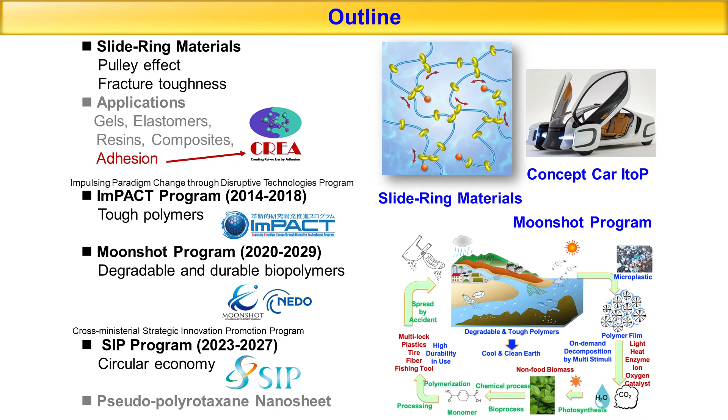What does a circular economy mean? I've been involved in polymer research on plastics, and the circular economy for plastics has been a hot topic in Europe. If you look on the internet, you'll find lots of discussion about this. Plastics are all around you.

Actually, plastics were developed about 100 years ago. Around us, there were ceramics and metals. They were replaced with plastics, and now they're everywhere. There has been mass production, mass consumption, and mass disposal.

The model for plastics has been to manufacture them, then either throw away, incinerate, or use them in landfills. But we'd like to find ways to use them longer, so that resources can be circulated instead of wasted. That is called a circular economy. I've been involved in projects related to such a circular economy.

You may have heard of the term 3R: reuse, reduce, and recycle. When you hear circular economy, people often think of recycling, but reuse is the most important. We want to use products over a longer period, but plastics are brittle and often get discarded.

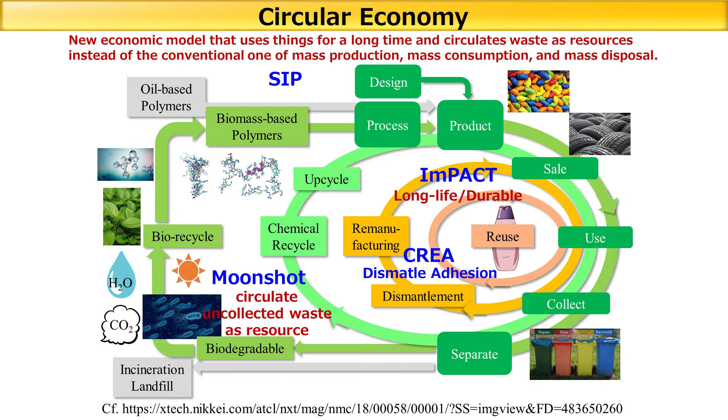For some, plastics might be an unfamiliar concept, but many materials in our world are essentially plastic, rubber, fiber, or even gel-based. Others include glass and ceramics. As mentioned earlier, this category encompasses rubbers like tires, textiles, fibers, clothing, and various gels. Indeed, these are all polymers.

Interestingly, our body's DNA and proteins are also polymers. In essence, polymers differ from metals and ceramics in that they are lightweight, primarily composed of carbon, hydrogen, and oxygen atoms, all of which are lightweight elements.

Whereas metals are the primary material for airplanes, alloys are also commonly used. But indeed, there are composites. Epoxy resin is used to surround carbon fibers as reinforcement. And all of these are composites.

The general mindset used to be that aluminum was used, but now they're polymerized. In the future, not just in airplanes, but in automobiles, such polymers will be used. Because if you use polymers, the weight will be halved and the mileage will be doubled. Therefore, polymers will be used more and more going forward. And as I said, we need to think about what we're going to do with the polymers that are abundant around us.

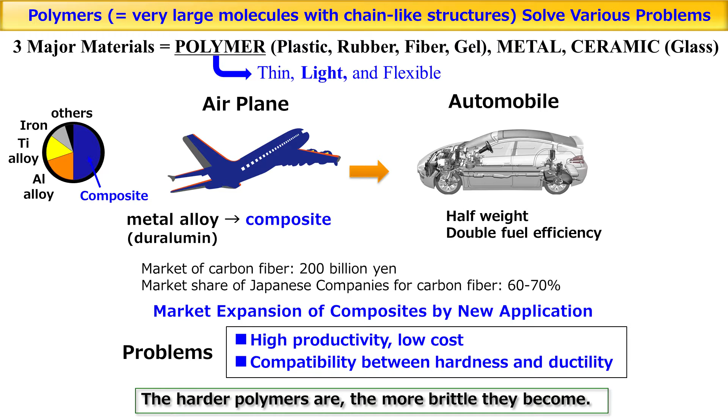Okay, here I'd like to first talk about slide ring materials. Because polymers are brittle, as I said. But why? This is an illustration or diagram of a polymer. It's like spaghetti. It's like a string, a molecule, and they're bound with this cross-link.

A tire is one example. These polymers are cross-linked and made into tires. When you connect them, they become very strong. But when you pull them, they will break apart. The lengths are really different, so the shorter segments are under lots of stress. That is why it is considered to be brittle.

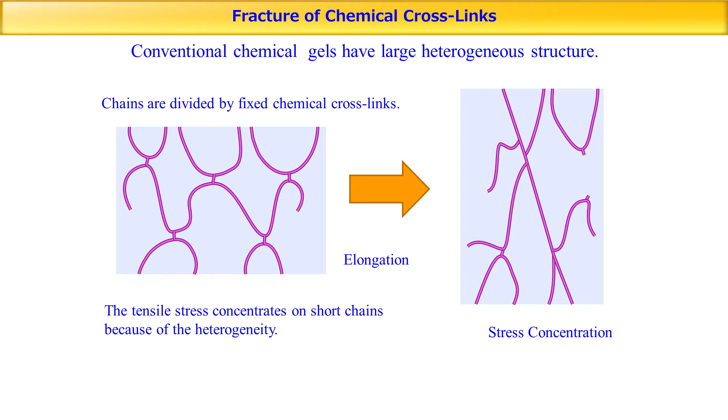To solve this issue, Japanese researchers came up with very innovative ideas. For example, Dr. Gong from Hokkaido University came up with this idea called double network, where the hard and soft networks will be put in order. So it's going to be very strong and will not break even if run over by cars.

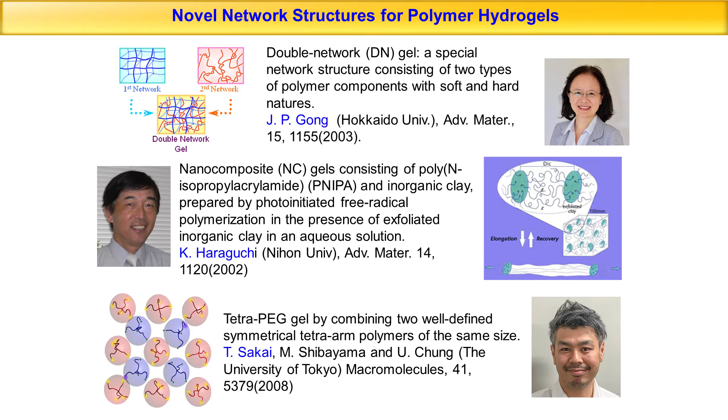We used a different approach to create a strong, durable gel, called topological supramolecules. This is a molecule, kind of like a wisdom circle, called a catenane. These rings are held together like this, and they're not chemically bound, but they will not come apart. These are called topological supramolecules.

Other examples include rotaxane, where there's an axis in the center of the ring, with a large molecule on both ends, so that they won't be pulled apart or separated. Polyrotaxane is like a necklace with many rings. This polyrotaxane was introduced in 1992 by Dr. Harada.

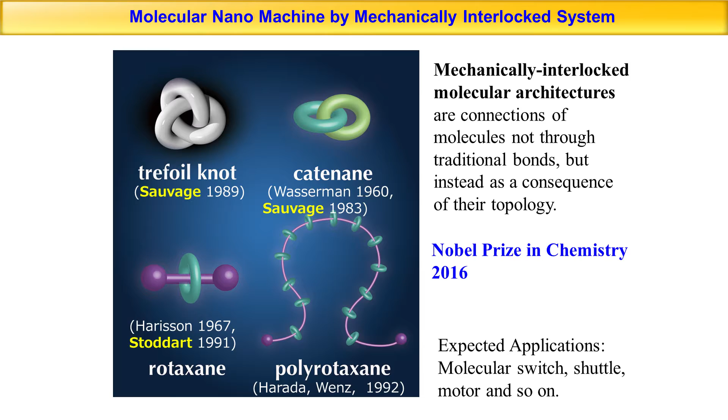In our research, we decided to cross-link these rings of polyrotaxane. What's unique is that, unlike typical cross-linking, we don't directly connect the strings. Instead, we first use these rings to thread through, and then connect those rings together. We cross-linked them, as we did in 2001.

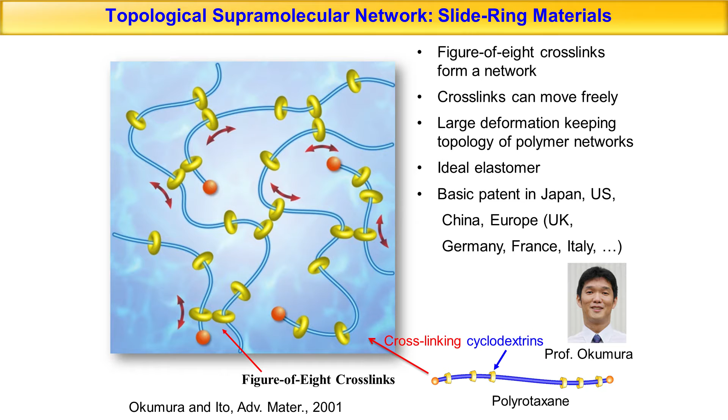This was actually first discovered by Professor Okumura when he was a student. Now he's a professor at Kyushu University. So, when you pull them, these cross-links, or the rings, will move.

You may recall the concept of a pulley from elementary school. The pulley will move, ensuring that the string receives even stress. This means the tension will be equalized, and we believe a similar phenomenon occurs at the molecular level.

At first, the length varies. But when pulled, the rings move, spreading the stress to ensure equal tension across the string. This is known as the pulley effect.

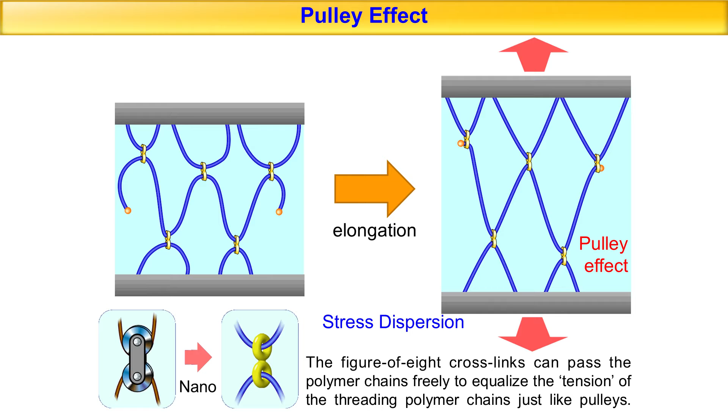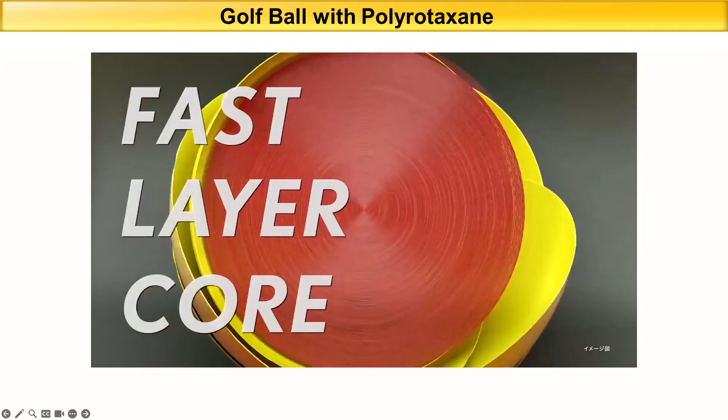It's already being utilized in anti-scratch coatings and also on the surfaces of golf balls. This technology is actually used by Hideki Matsuyama, the professional golf player. The balls are actually being coated and it gives a spin. I actually tried this myself, but when I do, it doesn't really work.

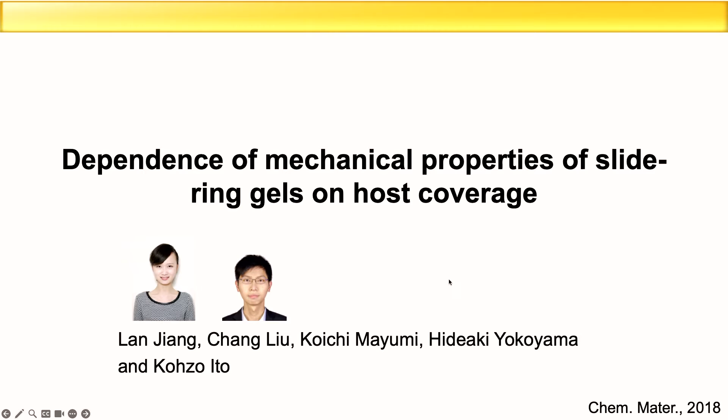Now, getting back to the topic of science. Recently, we have seen major progress. What was it? Traditionally, when you develop such a necklace, these are the number of rings that could be contained. If it fills to 100%, the number of rings in this case would be 25%, so there is some space in between.

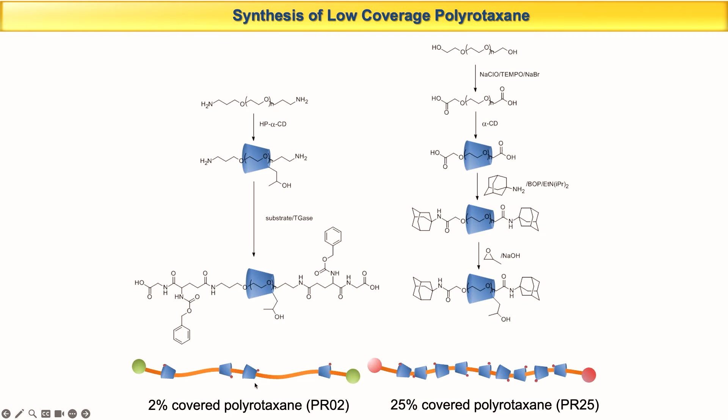But in our laboratory, a postdoc, Miss Jiang, studied this, and this 2% coverage necklace was made. That was a successful development, and with this spacious necklace, if you cross-link with the ring, it becomes very tough, very strong.

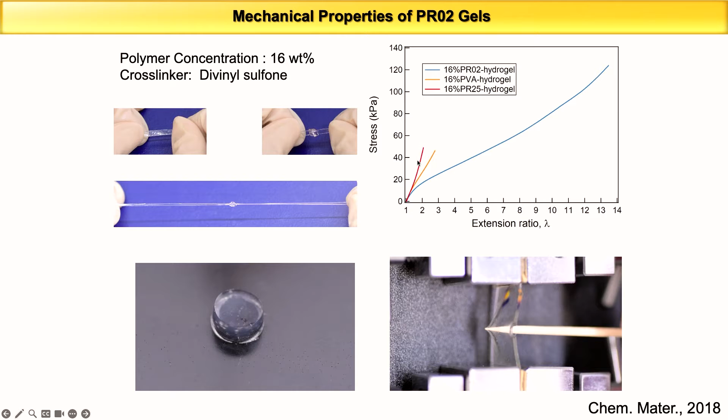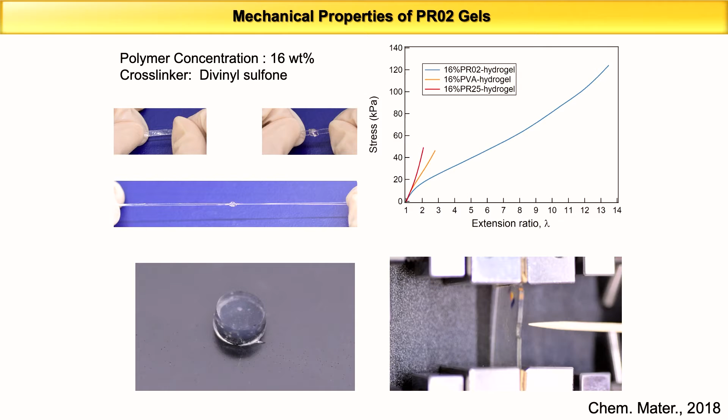When there are too many within this distance, it cannot be elongated. But if you make a 2% hydrogel, you cannot pierce through. And it contains 80% water. But you cannot cut it with cutters. It becomes very strong. Back when it was made, we didn't know why it was so tough. But then the reasons were found out about 3 years later.

Here is the scheme, as I said earlier. This is made of pulleys, the material's made of pulleys. And when you pull, what happens? Part of the ring moves. The ring moves, and when the ring moves, then the chain becomes exposed, and they align with each other. Then what happens is that they crystallize, and hard crystals are formed as a result.

The gels will not break. And if you release the stress, the crystals break and it goes back. This is called stretch-induced crystallization. It happens with gel. It was a discovery made for the first time with this.

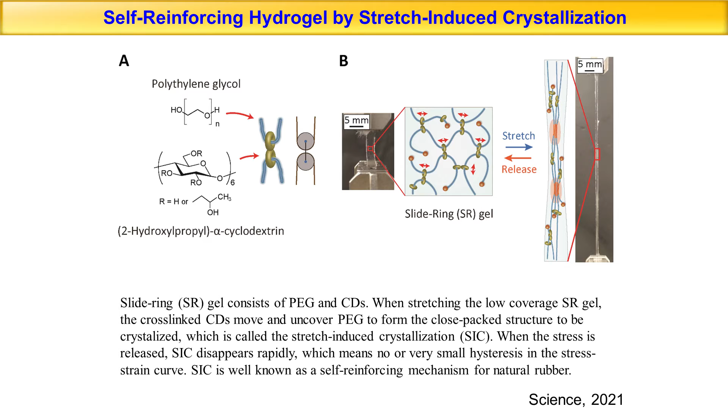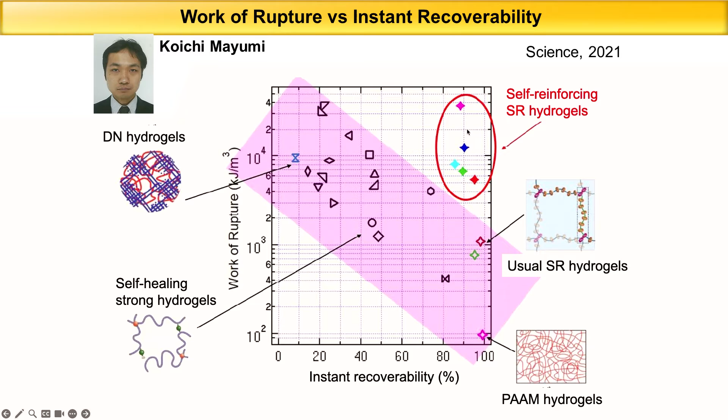As you can see, in the case of double network hydrogels, the strength of the gel was strong, but the recovery was poor. But in the case of this gel, the part of the crystal breaks very easily, making it harder. But if you release the force, it recovers very quickly. And that was verified with radiography, but I won't delve into any details.

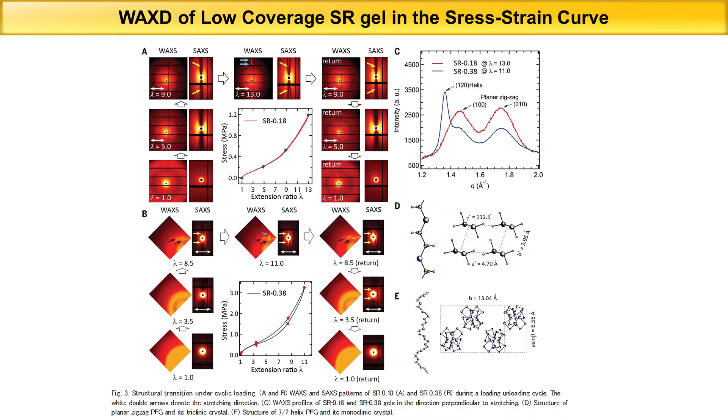Such tough materials have been developed with new concepts, and that's the type of research I've been involved in.

Starting in 2014, I became involved in the IMPACT project, a major national project. Various program managers were involved, each with a different area of research. I was involved in tough polymer, full-body polymer vehicles. Some were involved in robot development, or using spider thread for sturdy materials. There were various other projects initiated as well.

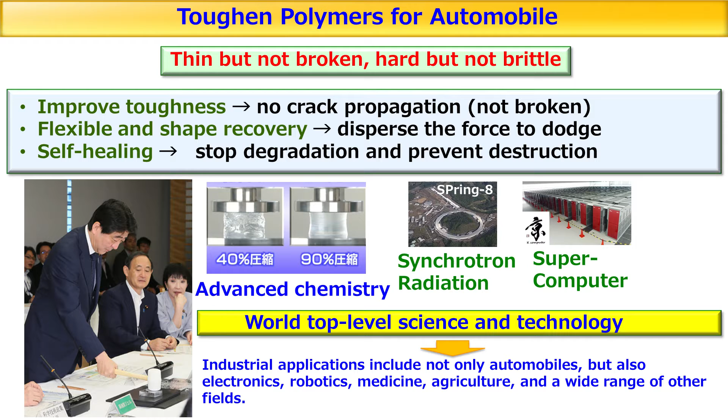In our project, cutting-edge science and chemistry, as well as synchrotron radiation and supercomputers, were used so that toughness could be improved, even when a crack was present and not propagating. Even with a crack, if you apply force, it doesn't widen or propagate, and it won't break. With flexibility and shape recovery, it can disperse the force and initiate self-healing, which is very important. Even if it breaks, it can heal itself, and deterioration and degradation can be halted. Destruction can be prevented, meaning the material can be used for a longer period, achieving a longer lifespan through this process. To do so, in Japan, including Tokyo, top-tier researchers collaborated on this.

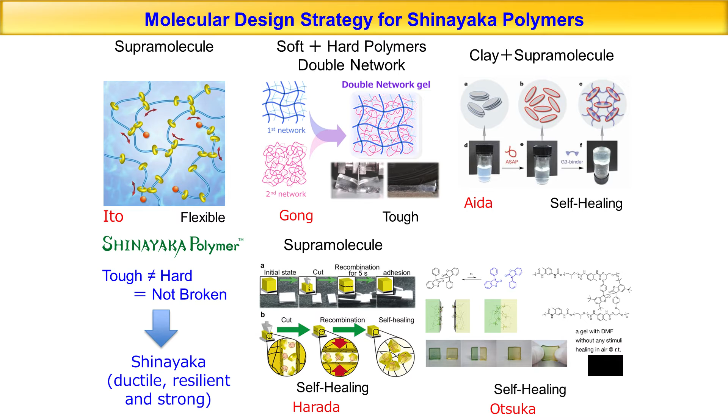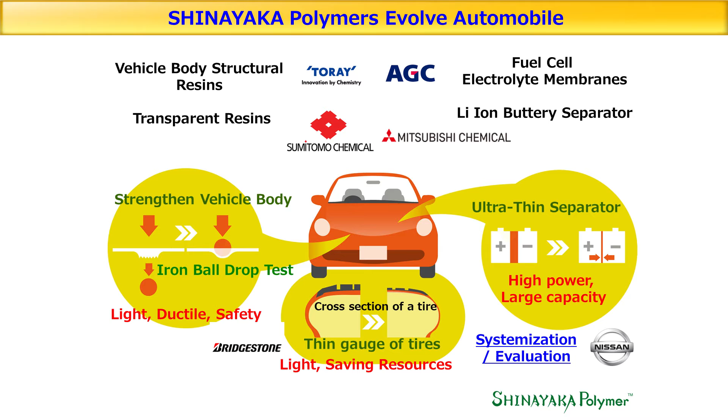From the field of physics, we saw researchers of various disciplines join. But the project was spearheaded not by academia, but by private companies. These companies participated because they wanted to develop tough polymers, joining forces with both companies and academia to develop new materials. That's really been the objective of the project — developing the polymer for automobiles. We worked on this for about 4 years. I don't have enough time to explain everything we achieved, so let me just go through 2 examples.

One is the collaboration with Toray. We worked on polymer nylon used for stockings and more — you might have heard of this. It's also used for automobiles. It's a very strong and tough polymer, excellent, but not very elastic. When pulled, it might stretch about 10%, but then it will break.

We wanted to enhance its toughness, so we added rubber to improve its elongation. However, this made it very soft and flexible. Balancing strength and tensile elongation while maintaining hardness is a trade-off — if you prioritize one, the other suffers.

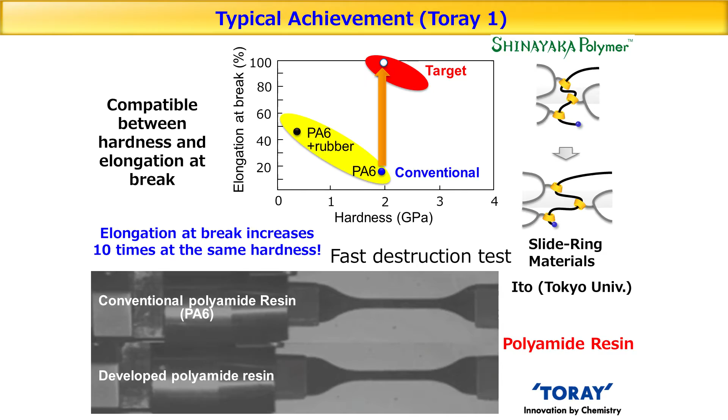But in collaboration with Toray, we modified the nylon into a necklace-like structure. Because of this, we were able to increase the elongation tenfold while maintaining the same strength, and it didn't break. What's impressive about this nylon sheet is when we conducted a bending test to see its limits: ordinary ones would break after 2,000 bends, but with just 5% of the necklace structure added, it withstood 90,000 bends without breaking, indicating a 50-fold improvement in durability. This means it can be used for a much longer time.

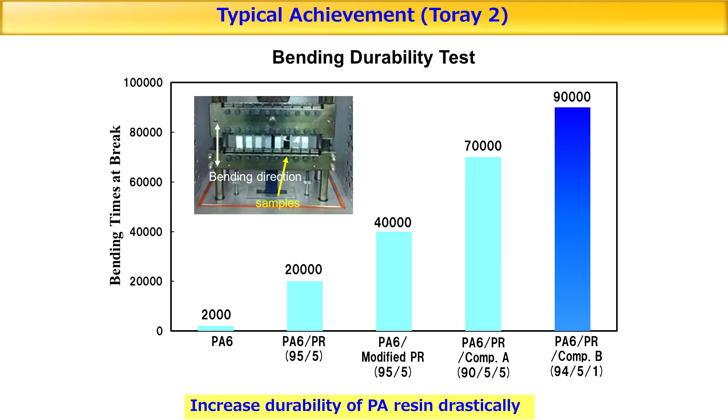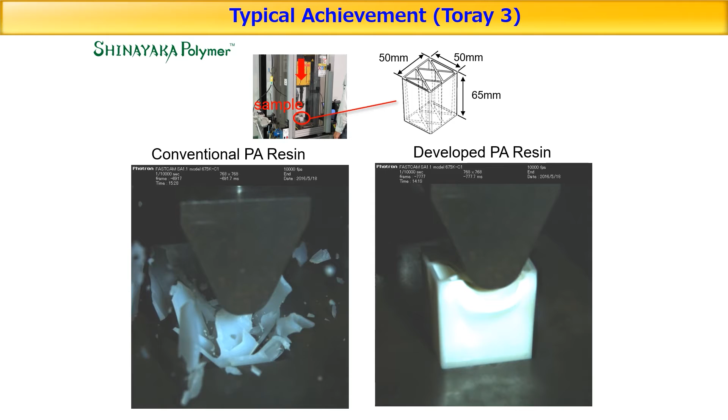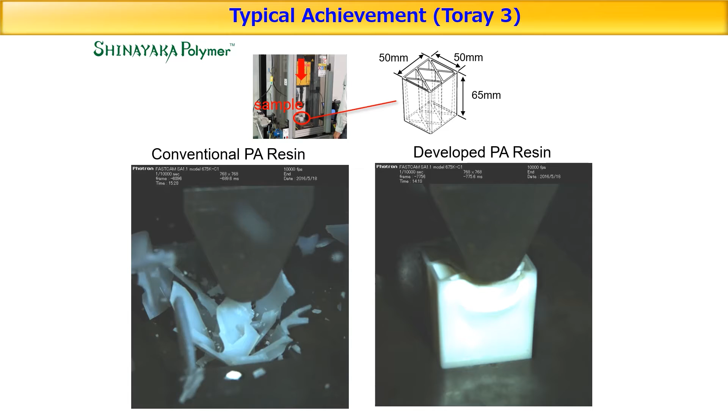It's a highly durable polymer, which is crucial for advancing towards a circular economy. In the iron drop test, typical polymers or plastics would shatter upon impact — this is a hazard in vehicles, as debris can scatter. But with our tough polymer, featuring the necklace structure in nylon, it doesn't shatter. It compresses, absorbing the impact energy. There are no small fragments produced. The way it reacts to force is entirely different from conventional polymers.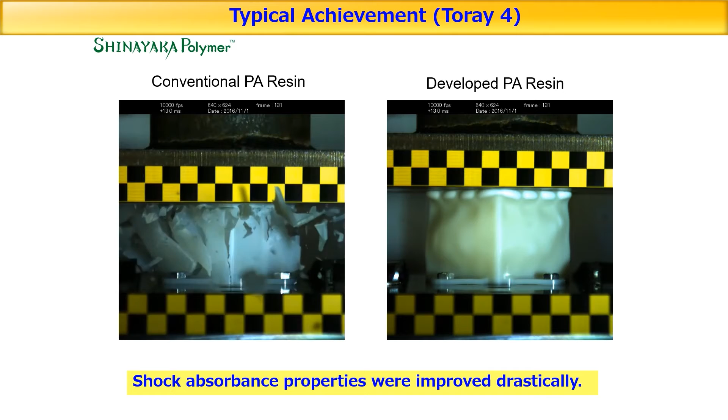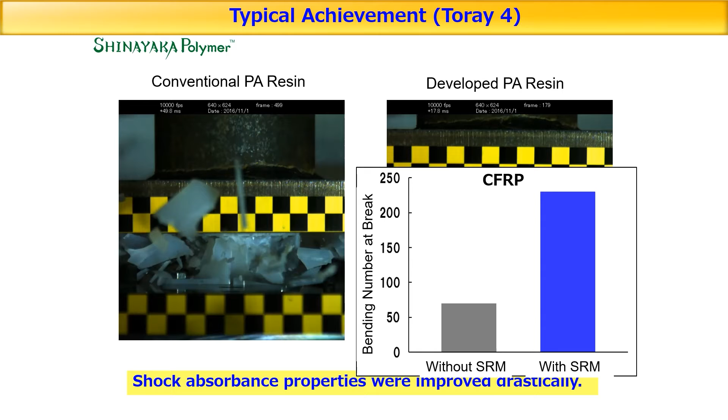This is a composite material designed for airplanes. We can expect the same level of impact resistance, and the durability has improved threefold. So this is one of the achievements that we made.

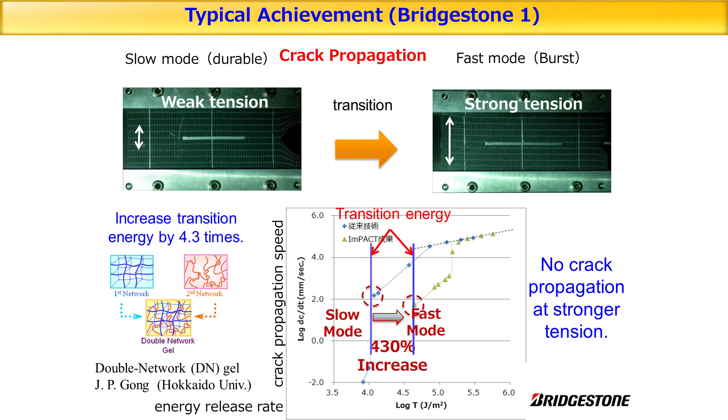The next example is the one we worked on with Bridgestone, a tire manufacturer. They wanted to create tough tires or tough rubber and aimed to reduce the pressure of the tire's film by half. The rupture energy increased by about 4 times. They applied this to the caterpillar — there's a rubber caterpillar. They tested it on a rough road, and wear was reduced by 60%.

This means that if you use this rubber formulation, the wear is significantly reduced. It's very tough and does not wear out so quickly. You can reduce the pressure by half, and the wear is halved compared to usual. Developing strong and tough polymers is crucial for the environment.

Here, these are rubbers on the top and bottom, and we're trying to pull them. We inserted scissors. The top one is regular rubber — after you pull them and insert the scissors, the rubber at the top ruptures. But the bottom one does not, due to its lack of crack elongation, indicating high durability.

Usually, when polymers break, a void appears, which becomes a crack, and the crack elongates, leading to rupture. But in this case, it does not happen, so it does not break easily and can be used over a long period of time. This is the double network I talked about. This principle was applied.

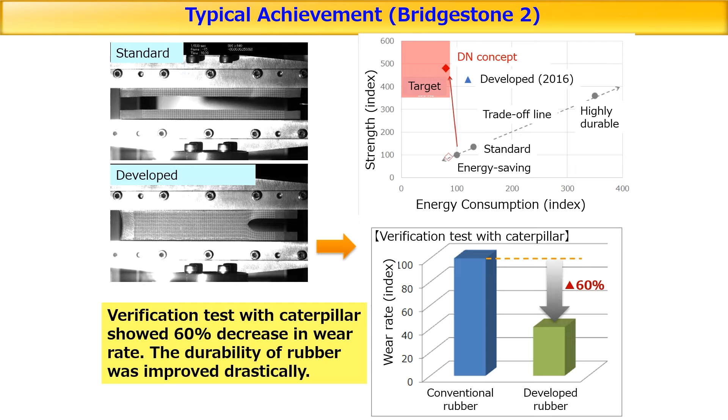These were some of the achievements we made, and we are trying to implement them, having also published our findings in various scientific papers. We've collaborated with several companies on these outcomes, and we wanted to make those outcomes visible to all of you.

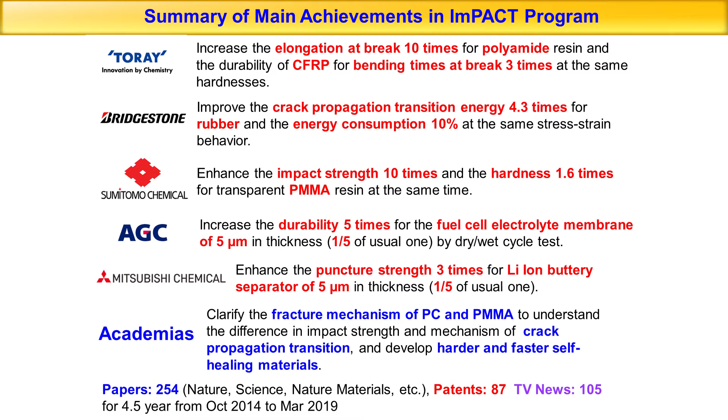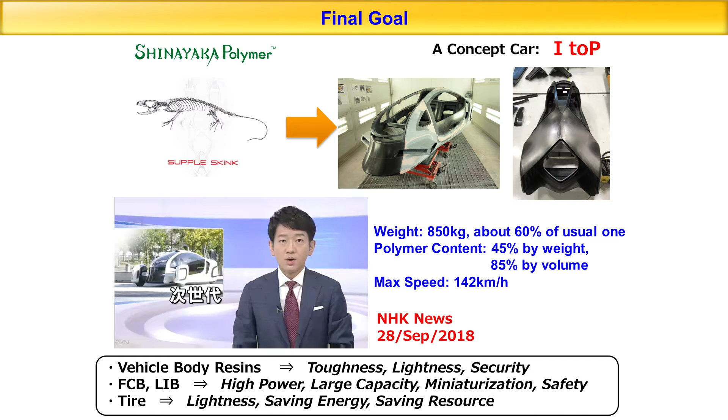Actually, all those companies have developed parts for automobiles. Once they are made, and if combined, we thought we might be able to build a vehicle. So here is a concept of a vehicle that was developed, and you are looking at the image of this concept car.

And it actually runs, even though it's a concept car. The speed is up to 150 kilometers per hour. And the weight is half that of conventional vehicles. But 90% of it is made of plastics.

The motors and batteries could not be made with plastics, but most of the parts are plastics. Even the springs in this vehicle were made of plastic. We built it, and it proved to be very strong.

Then we tested it on a circuit, trying to demonstrate that it doesn't break.

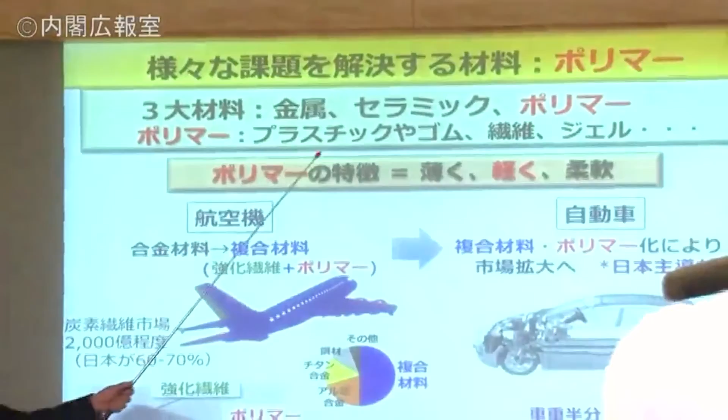Here's the photo, or the video, from the presentation at the Prime Minister's office, where the former Prime Minister participated in our experiment. I explained to former Prime Minister Mr. Abe exactly what I just explained to you.

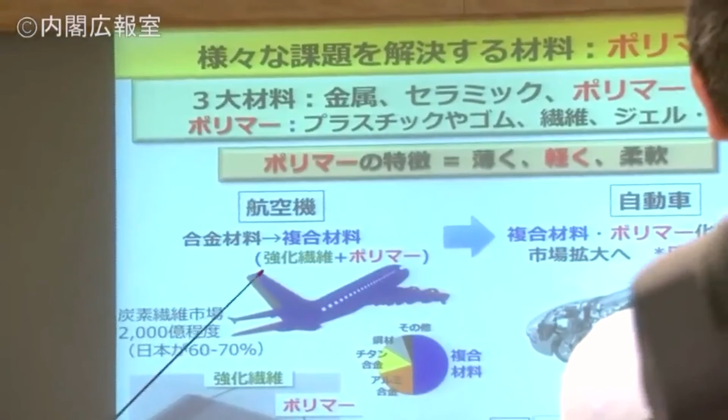And Dr. Yanagisawa, a student of Professor Aida, developed a self-healing plastic. We asked the Prime Minister to cut the plastic in half. And during my talk, it was joined back together. The presentation lasted only 5 minutes, but afterward you could see it self-heal without any adhesives.

It was broken in half, but then it healed itself and became whole again.

We also wanted them to experience a hard and strong polymer. We asked Mr. Abe to press on the gels, which broke like this. Next to it, we had double network gels from Professor Gong, and we asked him to hit it with a hammer.

The sound didn't really match. He was supposed to hit it only once, but he did so multiple times. Yet it remained strong. It didn't break, which is what we aimed to demonstrate.

That's an example we wanted you to see. The project was completed in 2018, and the subsequent project is the Moonshot project, which is ongoing now.

This work addresses the waste of ocean plastics. With plastics in the ocean, you know they are all around, and the problem is ocean contamination with plastic. Plastic should be collected, recycled, and reused.

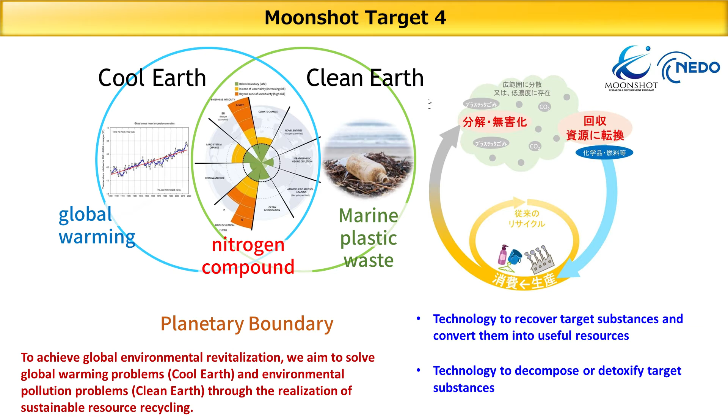We aim to develop rubbers, especially tires, that are degradable. That's the project's objective. Now, how much plastic is flowing into the water?

Well, most is from inappropriate disposal. This is not really an issue with plastic itself, but rather human behavior. If people didn't litter, that would help.

But there are also other problems, like discarded fishing gear. For instance, fishing lines remain in the water, causing issues.

You may have seen this on TV or YouTube, along with tire wear powders, which are types of microplastics in water. Now, what's the problem?

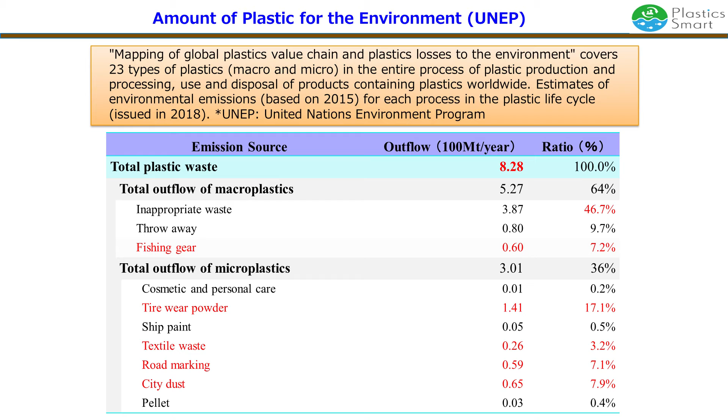There are degradable polymers. However, those polymers aren't tough. Durable polymers, on the other hand, do not degrade.

We need polymers that are tough during use, but degrade once disposed of. They should last a long time, but degrade quickly if they end up in the ocean.

We do not have any polymers yet with both of those characteristics. But that's what we aim to develop, and that's our objective.

Moreover, we want the components of the plastic to be inedible. We aim to create non-food biomass-based polymers divorced from petroleum products. If the biomass were edible, then it could conflict with the food issue. So we wanted to use seaweed and other non-edible materials.

And microorganisms could also produce them. Anything inedible could be used as a raw material.

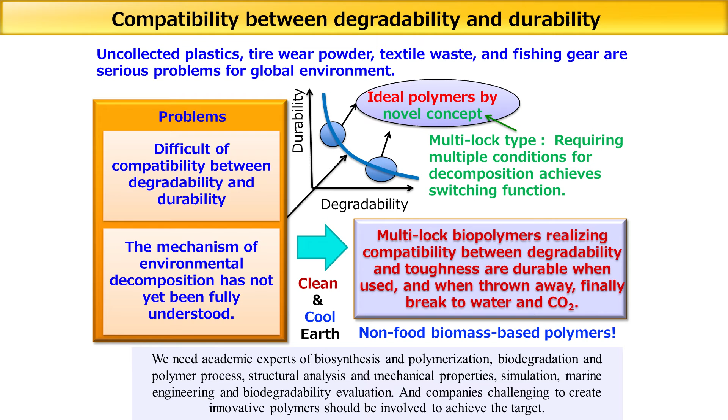We had other leading professors come together, working with different companies in Japan. We divided our roles to develop new polymers.

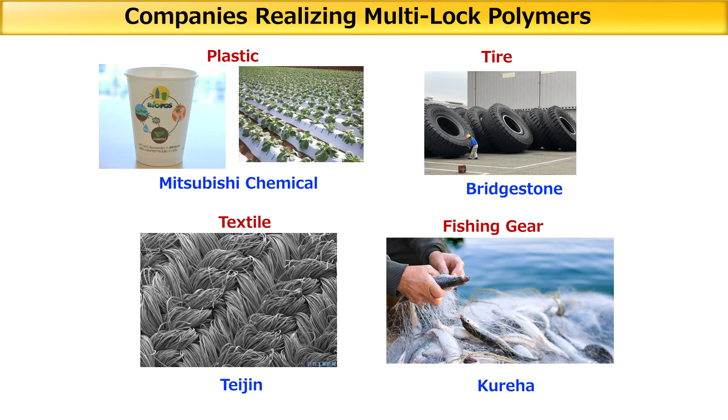We already have some achievements and would like to share them. This is one from Bridgestone.

As I mentioned, tires don't break down easily, but the polymers a tire is made of can break down. Of course, it depends on the type of polymer, but when cross-linked, they won't degrade.

However, in this project, the bottom one shows the regular cross-link, so it doesn't degrade. But this vertical line indicates biodegradability.

This new rubber, cross-linked differently, will biodegrade in the ocean, and its strength is almost double. It's not too hard to make something degradable, though it's not that simple. Just having this degradable property is not enough—it also needs to be strong. Balancing these two is challenging, but using technology from a specific academia, we were able to develop this tire. I cannot share all the details, but this is what we have achieved. With higher strength, tire wear will be reduced, lowering the amount of debris produced, so it's more environmentally friendly.

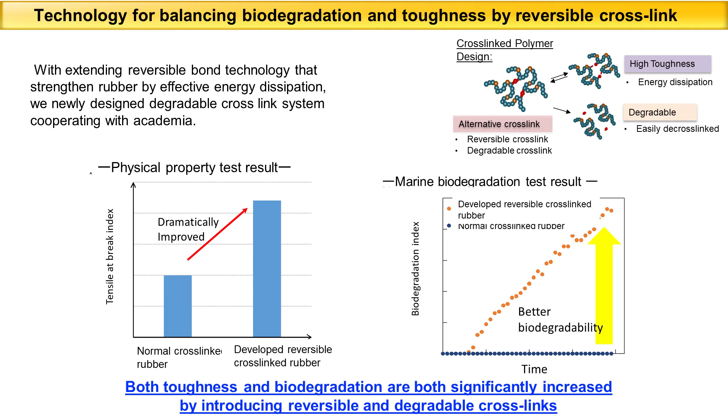So if the fishing line breaks, it goes into the ocean, but after a while, it will biodegrade. For fishing lines, it seems we are nearing a solution. The bigger challenge is fishing nets. Fishing nets stay in the ocean, so they have to be strong while in use, but when they break, they should degrade.

However, this is very challenging, and we're struggling to develop such nets. If you have any ideas, please approach us. This is actually a global problem, as discarded fishing nets float in the ocean, and they continue to trap fish. The trapped fish then decay inside these nets. This phenomenon is termed ghost fishing, and it's a significant global concern. It turns out the fish we consume may have been caught by these discarded nets, and we might be unaware of it.

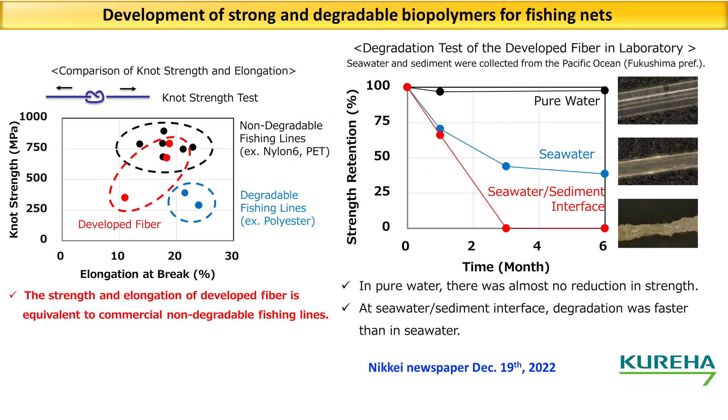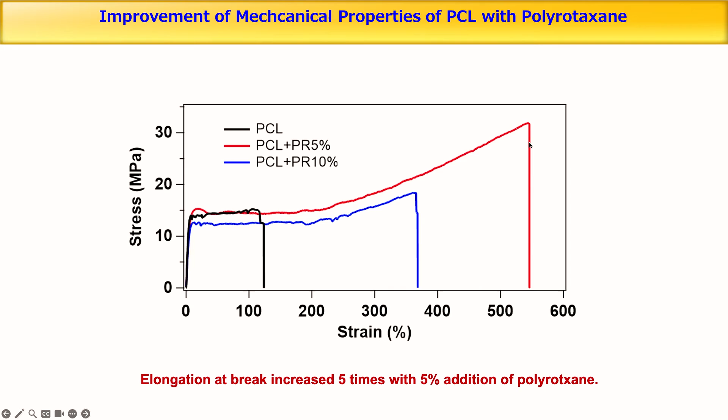But if you include 5% of this necklace structure, it becomes much stronger. Even if you increase the strain by about 5 times, it won't break. It becomes very strong. It does not just become stronger, but also more degradable, as shown by the number of days and the level of biodegradation by BOD vertically. The white circle represents cellulose, which is used as a standard material. Polycaprolactone, in fact, is a polymer that degrades less than cellulose, but if you add this necklace, its degradability is enhanced and accelerated degradation occurs.

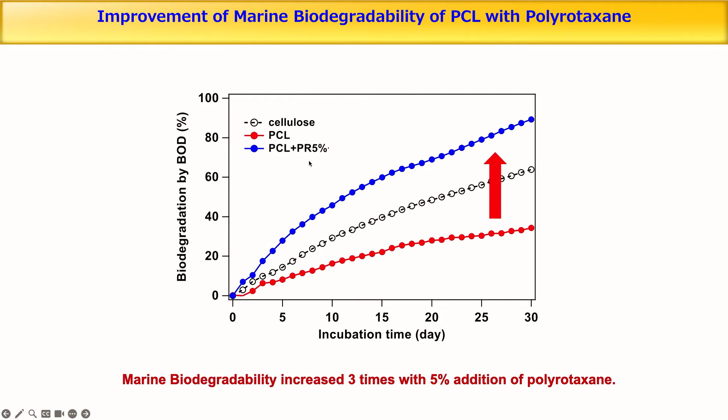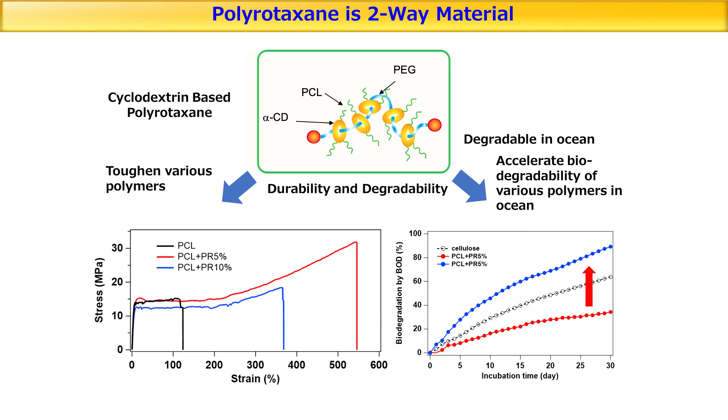Therefore, with polyrotaxane, these necklace supermolecules can make the material both stronger and more degradable. Achieving both these characteristics is possible. And Otani hit another home run, showing his dual capabilities. Typically, when you make a material degradable, its strength is compromised. But with this material, both can be achieved. So this could be a beneficial additive to polyrotaxane.

Using the remaining time, I'd like to discuss a new project that started in April this year. This project involves a cross-ministerial strategic innovation promotion program. What's the status of plastics around us? Here's a comparison between European countries and Japan.

On the graph, the green part indicates recycled plastics. Yellow represents thermally recovered plastics that are converted into heat, and the red part represents landfills. In Japan, as you can see, we are trying very hard to recycle plastics, but it's only 28%, which is lower compared to European countries. We would like to increase the percentage of recycling—that's an important issue and topic for us. In Japan, there is a high percentage of thermal recycling.

You know that a lot of home waste is incinerated, as it is thrown into waste bins. But in Europe, it's been criticized because it emits a lot of CO2. So plastic should be collected and recycled. That would lead to a better result.

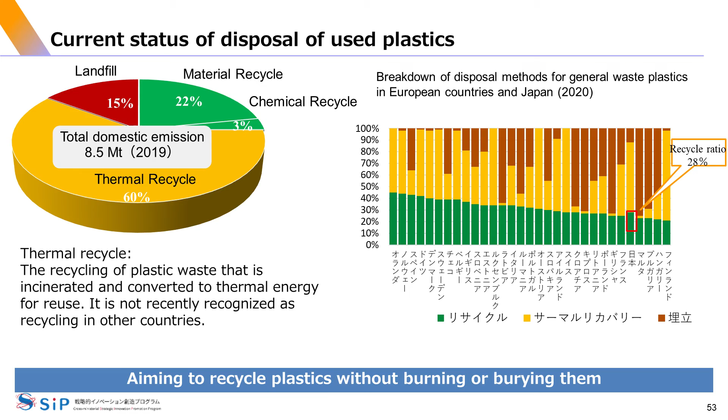However, in a circular economy, everything must work in a cycle. The business model will drastically change. In Europe, many venture and startup companies are involved in the circular economy, and they are really driving the circular economy model forward.

New business models emerge, new industries develop, and many new companies are established. As a result, they're advancing the circular economy. In Japan, we are lagging in this aspect. But in the future, in Japan as well, I expect to see more venture companies emerging to contribute to the circular economy. Various businesses will need to develop to match the size of the market.

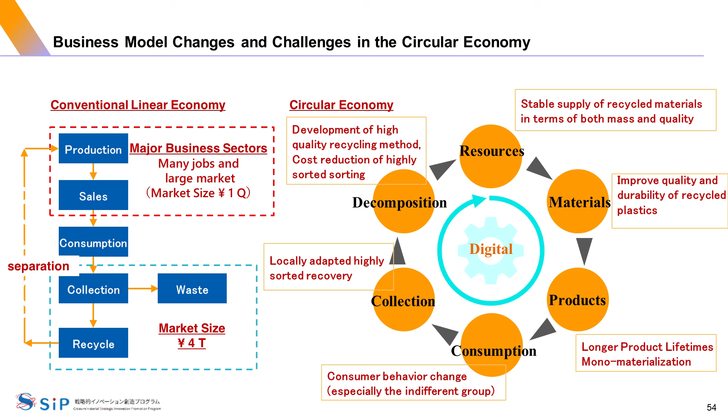Personally, I'm not familiar with this area. I'm a polymer specialist, but when it comes to collecting waste and recycling, I was not knowledgeable. But now I've been involved in this type of project since last year. I've been studying hard to understand recycling better, and I believe this is the biggest reason why we haven't seen much progress in recycling.

On the left, you see new plastics that have been recently made, polypropylene, which is most frequently used. We call this virgin PP because it's freshly made. On the other hand, there is recycled polypropylene, and the purity level is very high, even for recycled polypropylene.

But if you try to create holes in a test with virgin PP, holes are made, but the plastic itself doesn't break. The entire polymer retains its shape. But with the recycled PP, once a hole is made, it breaks apart. So it's very brittle. The strength levels are very different between the two from the start.

So in the case of recycled products, they can't be used like the virgin product. For example, I think PP is used for electronic products, but recycled products are utilized in some areas, but not for all electronic products.

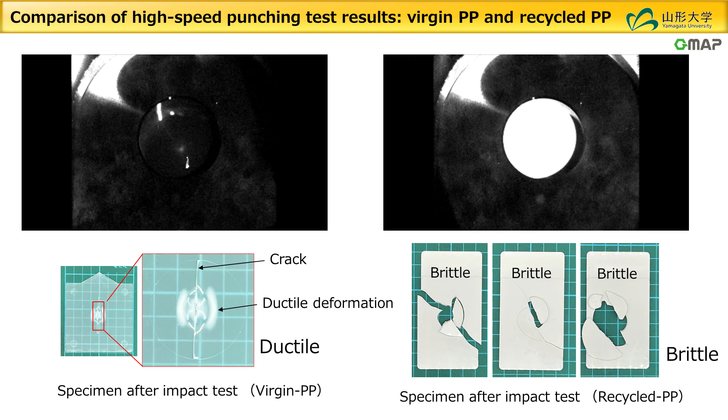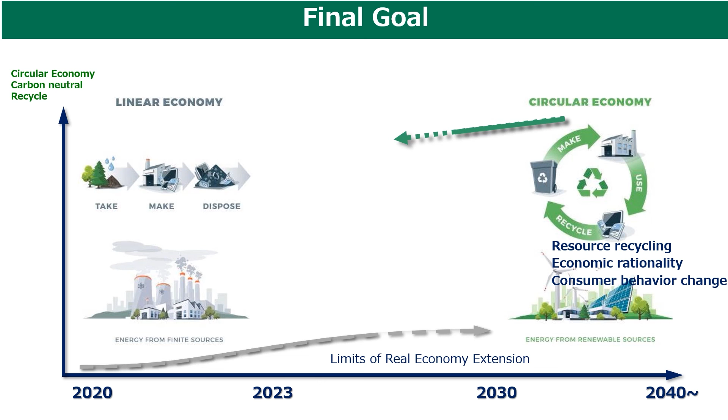The linear economy has been ongoing, using oil and fossil fuels, but there is a real limit. What we need to do to overcome this challenge is to develop innovative technologies. Also, changing consumer behaviors is crucial, as consumers need to prefer using recycled products. If they do not use recycled materials, we cannot effectively recover and reuse them. It's important to build a society where people are eager to use these recycled materials.

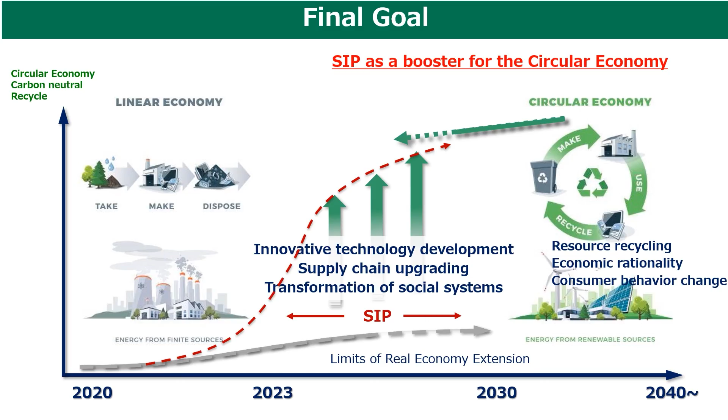Therefore, in the SIP project, we involve not just science professors, but also professors from economics and liberal arts. Both natural and social sciences are coming together, what we call integrated knowledge, to promote the circular economy project. That's all from me. Thank you very much.